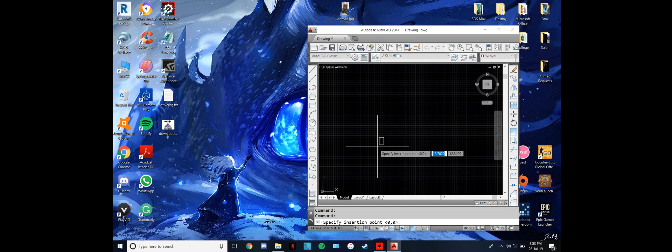So open AutoCAD, put the drawing in, scale it as much as you want using the mouse, or you can put a number in to scale it. Then use ortho mode, F8, to make a straight line at 0 degrees, and press enter. Here's the picture, so we're going to make an outline here.

First, you're going to use L for line, enter or space to confirm, and specify the corner you want the frame to start at. Let's cancel this.

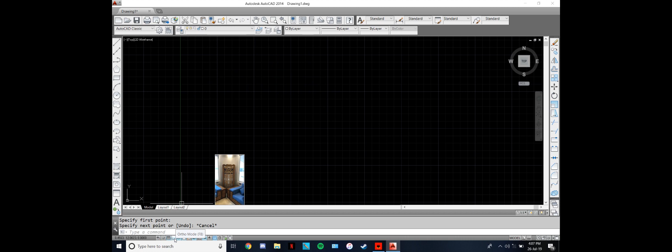If you press this, it's polar tracking. With this one, if you press line, you can use it at any angle you want, 160, 130, 44, 33, whatever number you want. But if you use this one, ortho mode, F8, the line you make can only be 0 degrees, 90 degrees, 180, or 270, and that's it.

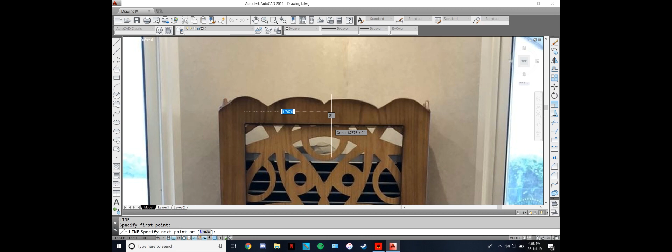So here we'll be using ortho mode for the frame. Specify this point and then take it above the half, because we'll only be needing the quarter. But if you want to make the whole thing, you can extend it all the way. If you look closely, we started at this corner but ended above the corner on the other side. You can notice the picture is not exactly straight, so we'll have to compromise. That's why I drew it only as a quarter, because that's the closest thing I can get to the line.

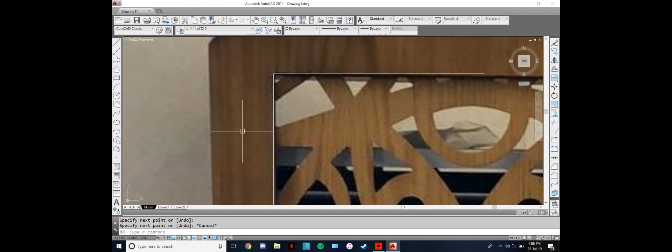And then on this side, draw the line here, and make it go below the half. Here we have the same problem, so we'll also have to compromise here. So I'm going to switch back to polar tracking by pressing F10. Here, F10, you can see polar on in the commands right here. So let's start tracing.

Like this, so on and so forth. This is for the straight lines.

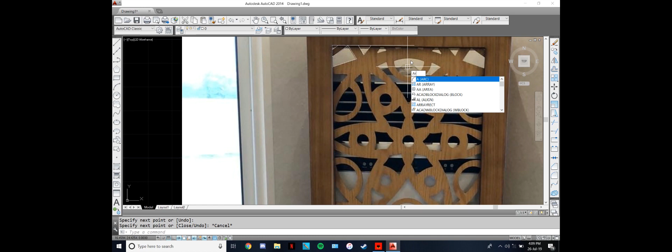And now for the arcs, press ARC, enter or space to confirm the command. For the arc I'm using, you take the first point, the second point, and the third point, and you'll get an arc. From this point to this is the radius. It's 2.6 here, so this is the arc.

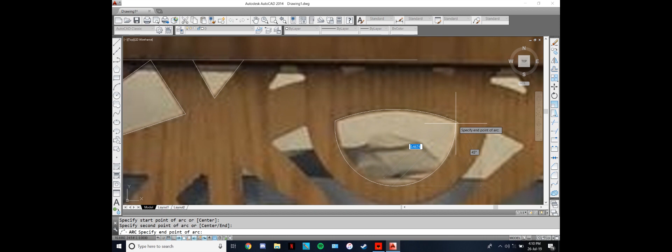So here I'm gonna start again: take the first point, the middle point, and the end point. Here we have an arc. First point, middle point, end point. Same thing here. First point, middle point.

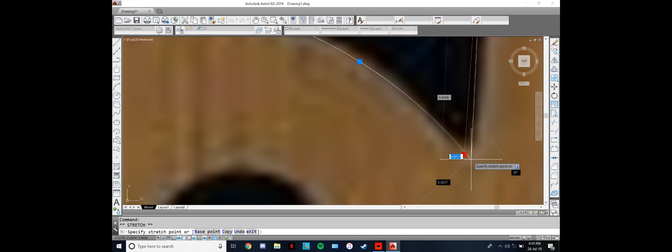End point, and then we're going to switch back to line. This is a straight line, like so. If you want to extend, you can select this and just extend this a little bit. Yep, right here, it's perfect. Not exactly perfect, but it's better than nothing.

Okay, so then for the circle, if you want to make the circle, you can see that all the circles are the same size. So here I'm just gonna try to approximate the center of the circle and then specify the radius of the circle. Then now I have the circle.

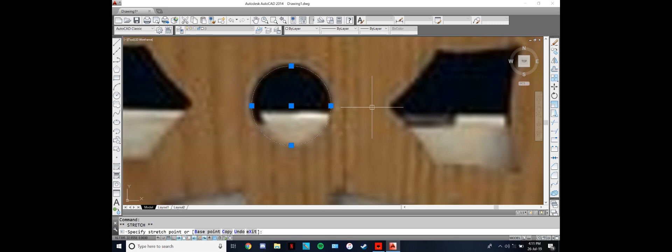So here, when you select this circle, if you press in the middle, you can move it to wherever you want, and if you press the end points, you can extend the radius however you like. So this is good. Just extend it a little bit right here, and like this.

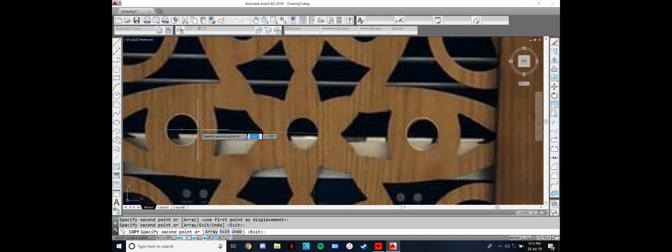Yeah, this is good. You can just CO for copy, then take this point, move it. Oh, yeah, sorry about that. Copy, then move it here, then move it here, here, etc.

So I've already finished this, so I showed you what I did. So this is the one I drew. I only drew this part, nothing more.

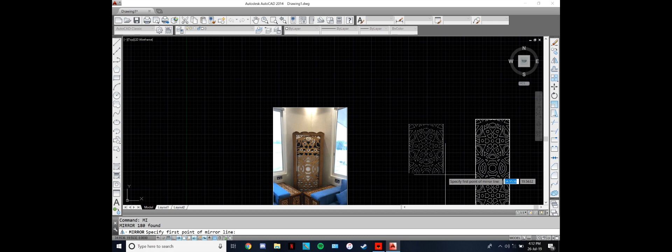And then what I did is I used the mirror option. The mirror option lets you mirror the object, just like this example right here. So use the mirror, select the object you want to mirror, then confirm, then choose the end point, and then go down a straight line just like this, and then mirror again just like this, and boom.

Here we have the complete drawing. This is the drawing that we used.

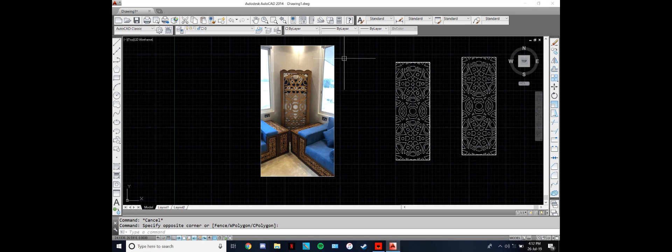So now I'm gonna show you how I can change this into an ArtCam profile. So when you want to change this, now we don't need those, we only need the final product.

So here, open the file, save as, save it wherever you want. I'm gonna save it on my desktop right here. The ArtCam we're using here is ArtCam 2008, so ArtCam 2008 takes AutoCAD files, AutoCAD 2000, LT 2000 drawing and lower. So we're gonna use AutoCAD 2000 file, change it to customer 1 and save it.

Here I save the file here and name it customer 1. I'm just gonna cut it, paste it here. This is the file. Now I'm gonna open ArtCam.

When ArtCam launches, you can go to File, open, and then open the file you want to use. So this is the file customer 1. Open it. This size doesn't matter for now. Press OK. And then they're gonna ask you if you want the vectors from the file. Press OK. Now we have the vectors.

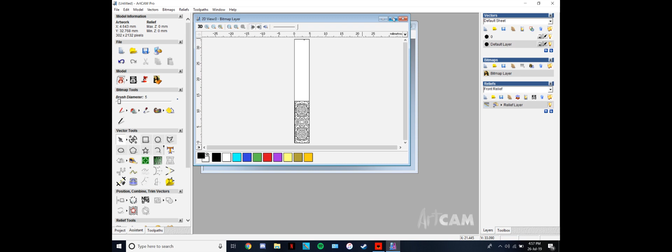Now the vector size of this is 4.6 millimeters and 13.29 millimeters. So what we want is, let's delete this and select this. Group vectors, group them so that they're one. So if I press on one, select all, it's gonna move it.

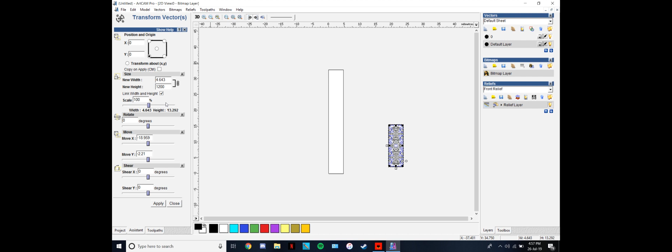Now I'm gonna transform vectors, move it to the bottom left corner at 0, 0. Make the height 1200 millimeters, or 1 meter and 20 centimeters. Apply. So this is the drawing.

Now I'm gonna copy this, Control X. Now I'm gonna press Control N or open file, new, and then new model, and put the size of the sheet. The standard size of the sheet is 2 meters 44 centimeters or 2440 millimeters, and 1220 millimeters or 1 meter 22 centimeters. Now press OK.

Would not like to save. Now expand and then copy this. I'm gonna, here, I'm gonna select this again, go to here, put to the positioning.

I'm gonna pin this, so, and now I'm gonna transform vectors, move it to the bottom left corner at 0, 0. This is 1200. Apply, and here it is.

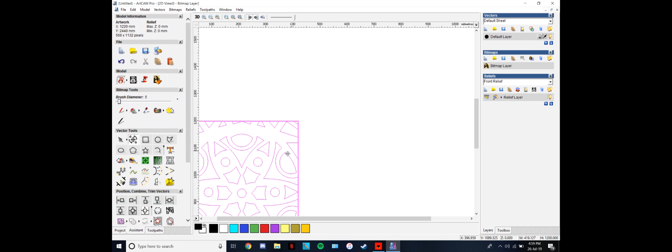So here the height is 1200 and the width is 419. So now you can see that before I grouped it, the lines were all black, but when I grouped it, some of the lines turned pink and some of them are still black. So the black lines are accepted by the profiling tool.

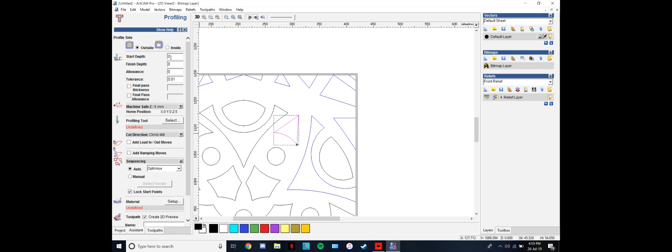So if I go here, go to toolpaths and then press 2D profiling. This is a 2D drawing, so the machine is gonna be cutting these drawings. So I'm just gonna go to 2D profiling. I'm gonna choose the depth. I need it to be 8 millimeters, cut from the inside, and select profiling tool. I'm gonna use a 5 millimeters.

Well, the one we have is 4 millimeters, so what we're gonna do is edit, diameter is 4, step down, we're just gonna keep it. The tool number, our machine has 2 tools, tool 1 and tool 2. We're gonna be using tool 2 since tool 1 is not functioning at the moment, and the rate, we're gonna put it at millimeter per minute, and the tool units is millimeter, not inches, and confirm. Also, if this is 4, you're probably gonna need to change the name, 4 millimeters. Press OK. I'm gonna choose this, select.

And now extend the end mill 4 millimeters, and the step down. The step down is every lap that the machine takes is gonna be 2.5 millimeters down. So since this is 8, for one piece, it's gonna do it 4 times. So 2.5 millimeters, and then 2.5 more, which is 5 millimeters, and then 7.5, and then 8. So we're gonna need to put it at 8 or whatever you want. Usually if the sheet is like 18 millimeters thick, I put the step down to 10 millimeters, and then here the feed rate, the speed, I'm gonna put 300.

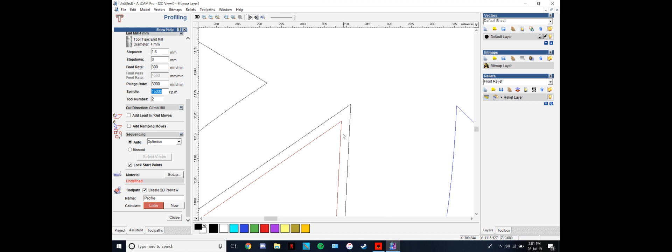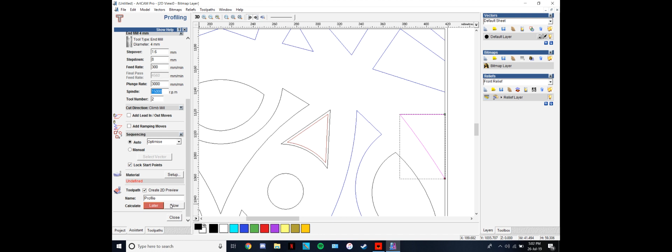Then press now, and if you look here, there's a red line. So with this red line, the bit is gonna be moving like this between this line. It's not gonna go above this line, so it's gonna be cutting here. But if you go to the blue line, such as this one, and try to work it, it's not gonna do it properly, because see here, it's gonna cut a part of the sheet we're gonna have, which we don't want.

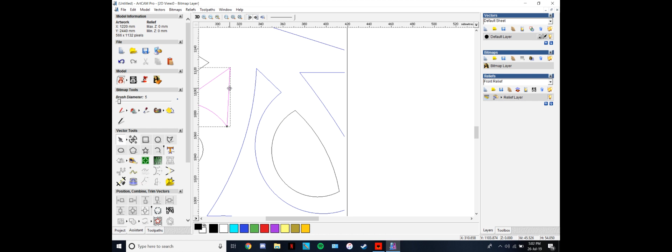So what we usually do is close this, unselect, and go back to assistant, and here we're gonna need to delete this for a second, or just cut it. And then this one we're gonna combine it, so the machine starts at the green point and ends at the red point. Just like here, as you can see, there's only one point. If you press P at whatever line you choose, you're gonna be able to move the start point of the machine, but here you can't actually do it. So what we're gonna do is make it all into one line, one shape.

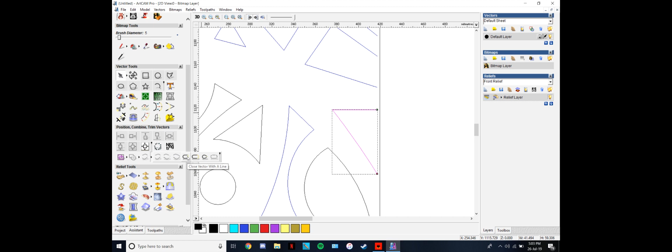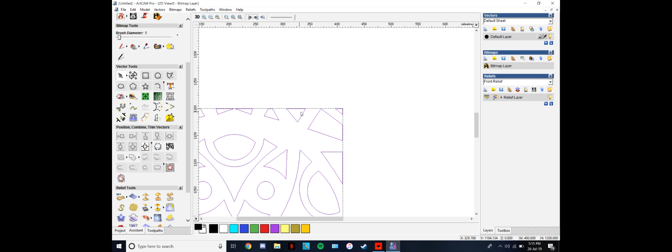So we're gonna go to the vectors, and we're gonna close the vector with a line. So if you look here, now it's closed, it's all in one. Now if you go out, group vectors, then go back, it changed into black color. So now the machine can work with it, and so on and so forth. So do this to all the blue ones. If you see an extended line that's coming out of here, like this, this one is gonna be red. Now I fixed all the mistakes here. It's all grouped, and you can see that none of them are blue or red, which means that everything is good now.

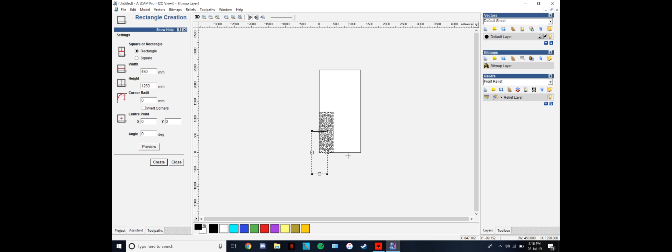So now we're gonna make the frame, because we need to have a 5cm frame, or 2mm depending on the customer, but we're gonna make it 5cm. So the height is 1200, so we're gonna add 50mm, and the width I changed it to 400, so we're gonna need to put the width at 450 and then create the rectangle. Now gonna need to take this, move it here, take out drawing and move it here.

Now we're just gonna take this, go to transform vectors, move it to the left corner to 0, 0. We can check the height here and the width, apply. Now it's in this corner. Now we're gonna select our drawing and select the box and center in page.

So we're gonna center this in this. So center. Oh, this one centers it in the page. This one centers the vector. So now this is the final product.

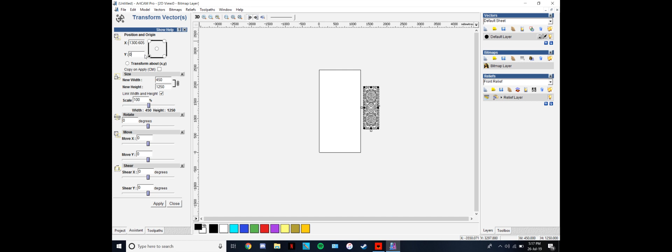Gonna go again, group vectors, gonna transform, move to the bottom left corner to 0, 0, then apply. Now it's in this corner, the corner we want it to be in. This line we don't need to keep, because if we keep it, the machine is gonna register this as a vector and cut around this, but we don't need to cut around this.

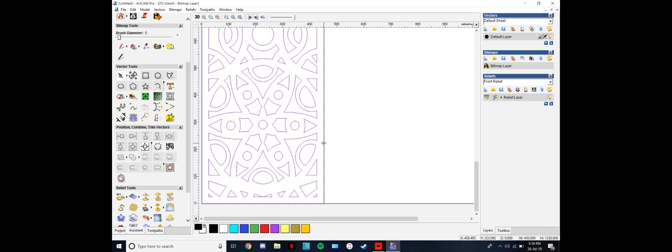Because the piece of wood we have is already 1250 and 450, the outer box is not needed. We just needed it for now so that we can get the inside to be in the exact position. So I'm gonna delete this.

Now I'm gonna select this, group the vectors, go to toolpaths, 2D profiling, and then I'm gonna put a profile side from the inside, so the bit's gonna be moving inside, not outside. So need inside. The depth is gonna be 8. Profiling tool is gonna be end mill 4 millimeters on wood. Make sure it's rough and 2D finishing. End mill 4 millimeter. Select and then go down.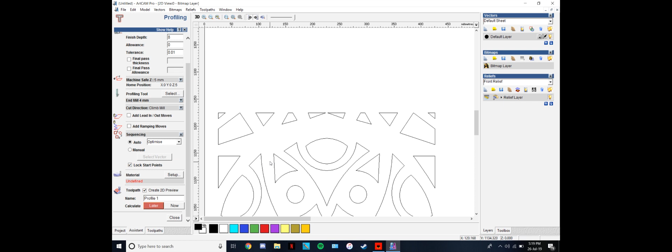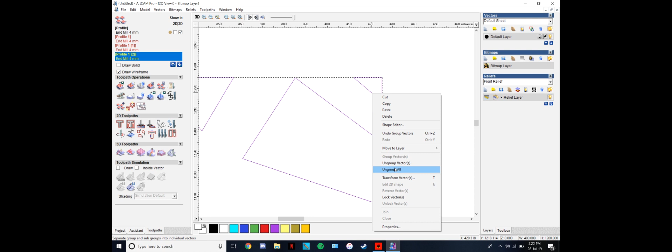Press now. And okay, we have a mistake here. So let's fix it. Let's see where's the issue. So if we select this, ungroup, and try to look at this, I think we might have an overlapping. I found what the problem was. So if I select this, group it together, then here we have blue lines. Ungroup. Yep, there's a line here.

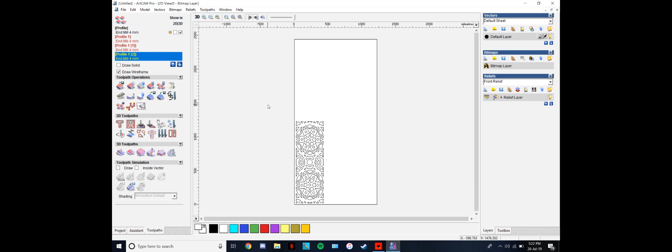I'm just gonna cut this, delete this, and then paste it, and do the same thing in this corner. I'm gonna cut this, delete this, and paste it. Gonna cut this, delete this line and paste it. Same thing for this corner. Gonna cut it, no line. Okay, good. So now it should not be a problem.

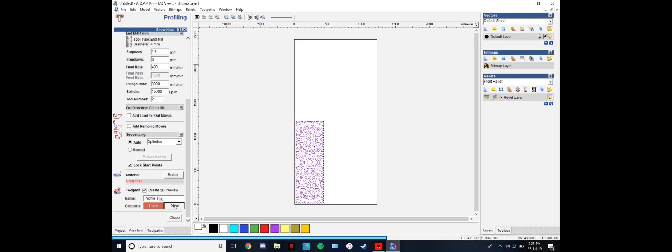To profiling. Wait, here I already have the option here. So select all, group vectors, 8, and then the 2D I chose this. Step down, put the step down at 8 millimeters. Feed rate 300 or 400. Tool number is 2, the one I'm using. Press now, and yes, success.

So if you look at the red lines, this is the... okay. So everything's ready. If you want to check how the machine is gonna move, just right click on the drawing, simulate toolpath, give it a second, and it should show you. Simulate start. And so the simulation right here, it's gonna be cutting them like this.

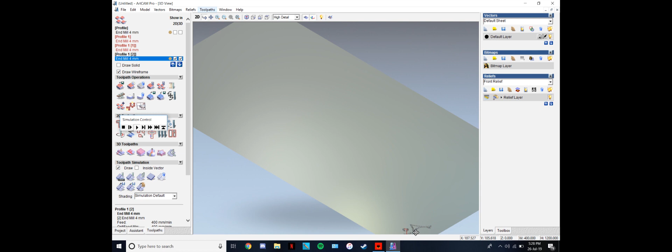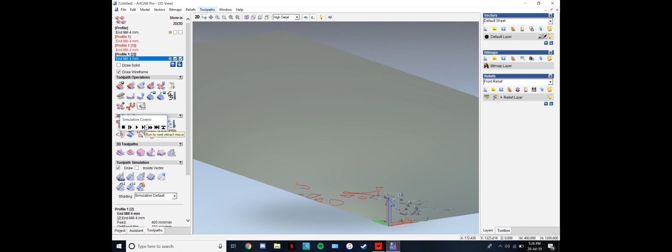Now this way you can simulate how the machine is gonna work its wonder, as you can see. Then now just fast forward to the end. Next retract, so on and so forth. It's gonna finish all of this and the whole thing. Now like this you can see how the machine is gonna work it. So just wanna save.

So now I'm just gonna save on desktop samples. Here I have some extra NC type files on my desktop, so I'm just gonna save it on file 33, save it, replace it, and close. That's it.

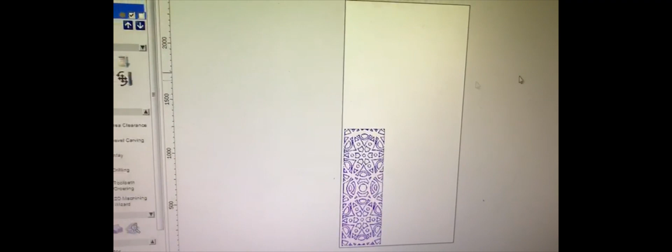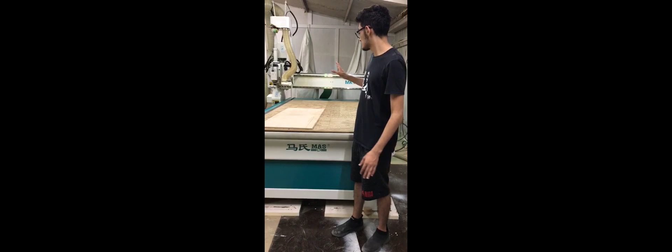So this is the CNC router machine. There are different kinds of CNC machines. There's CNC routers such as this one, the one that has a bit that goes through the wood. There's also CNC plasma, CNC laser, and CNC water jet. As I already said, this is a CNC router. So if you follow me here, these two are the routers. This is tool 1 and this is tool 2. At the moment we're using tool 2 as our main router, but we can use either of them.

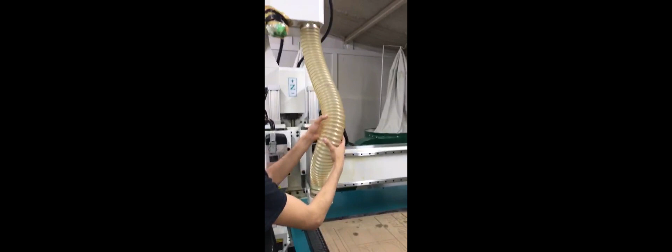So look here, this is the dust collector. I'll talk about the dust collector in just a second. So if you look here, this is the bit. This one, this is the bit. Okay, and this whole thing is the router.

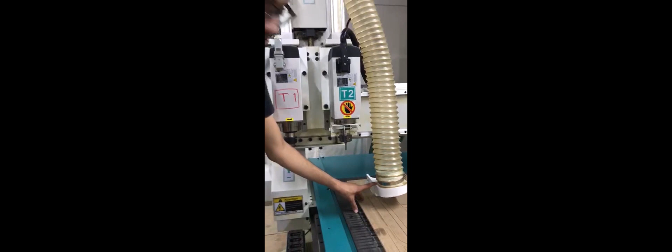So when the machine starts, this router spins the spindle or the bit at 15,000 RPM. Of course, you can set your own RPM, 15,000, 12,000, whatever suits you. If it's a very small, thin bit, you can use lower.

RPMs, but this is a very big, this is a 6 mm bit, so we're using 15,000 RPM. So let me close this.

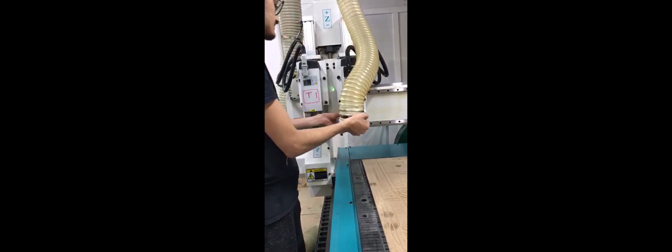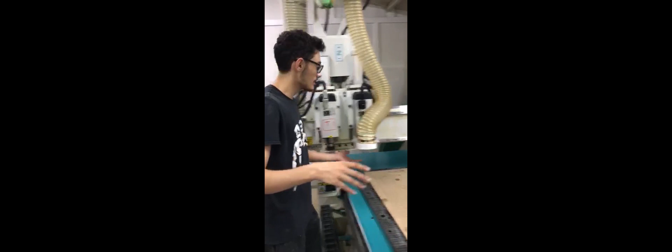Okay, so now we're gonna talk about the dust collector. The dust collector does two things. First, it sucks up the dust left out from drilling through the wood and takes it up here, up this one, and through here and into these bags. These bags are full of dust. You can see they're full of dust. The second thing that the dust collector does is collect the cold air from the room and pull it up through the router and the dust collector to cool down the spindle.

Okay, so now let's talk about the vacuum. So this is a water pump. It uses water to create pressure to create a vacuum. And here, look here. These holes are where the air goes through.

So the vacuum just sucks out the air, and the air passes through here and sucks down the piece of wood. Well, currently the piece of wood that we have here is damaged. So if it's sucking the wood, it's going to be leaking the air. So we're not using the vacuum. We're just using clamps. We put clamps here to hold the piece of wood in.

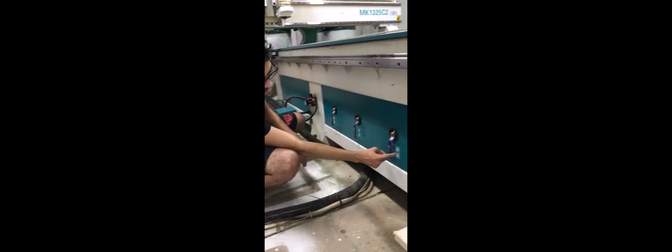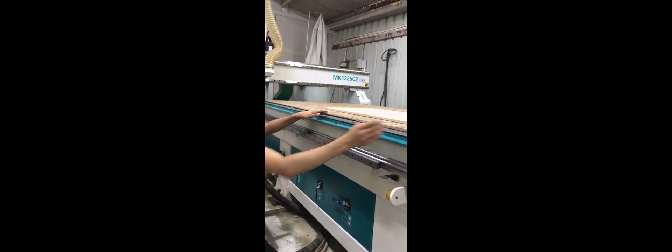Okay, come here. We have here 3 switches. The first switch, as you can see here, is for the first part. So this part here. It opens and closes the vacuum here. Now the vacuum is open, so if I turn on the vacuum, it's going to be sucking air. If I pull it up, it's going to close. As you can see here, it says open and close. So now it's open. If I turn it like this, it's gonna close.

The second switch is for the middle, as you can see from the symbol. So like this is open, and like this the vacuum is closed. So in the middle it will not be sucking any air. And here, this is the last one. This is for the top. It opens and closes the vacuum just like these two.

So how can this be useful? If you have a piece of wood here that you need to adjust, but you don't want to turn off the vacuum, you can just pull the switch up, change the position of the piece of wood, and then open the vacuum from the switch without turning off the vacuum itself. Maybe the vacuum you have takes a long time to warm up or to start working. So this is very convenient.

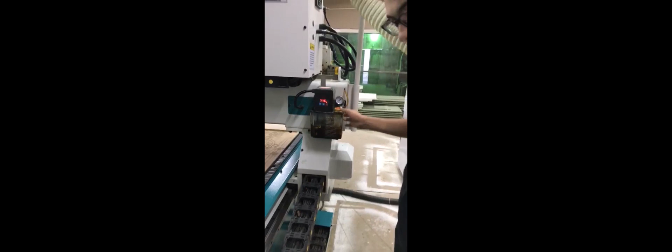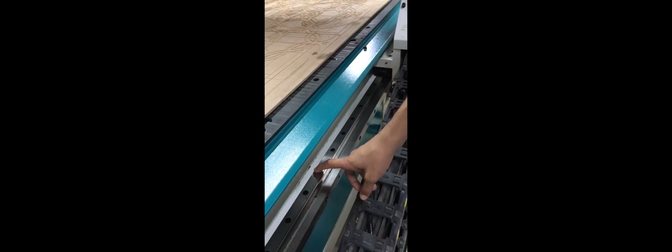So this is the oil tank or the oil container. The oil here lubricates the rails of the machine, such as this rail. This is the rail for the y-axis. There's also a rail for the x-axis and the z-axis. So if you look here, there's a timer here. We have the machine set so it drops oil for 2 consecutive seconds every 8 hours.

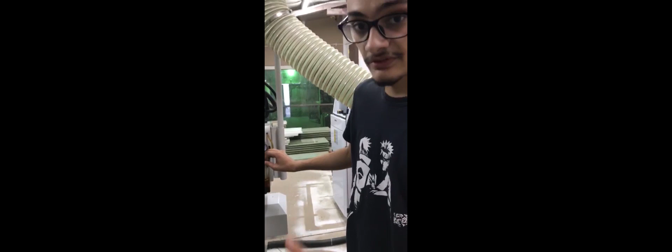Usually when we start working on the machine, we turn it on for 8 hours until the work is done. So every day we just work for 8 hours. So we have this set for 8 hours, and it drops 2 seconds worth of oil. If you look here, this is the filter for the oil. We put the oil in here, and this is also a filter that filters the oil, just in case there's any dirt or any waste. We don't want the waste to be in the oil, because we want the oil to be clean when it goes to the rails, so that it doesn't cause damage to the rails.

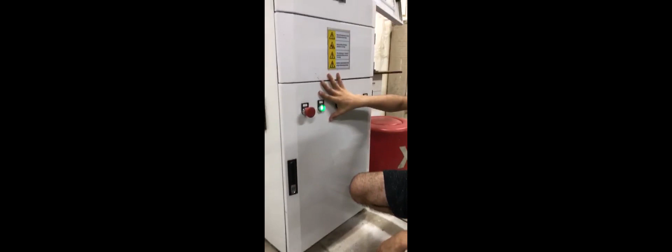Okay, so here we have 5 switches. The first switch is the stop switch. This is an emergency switch. If I press this, it stops the machine.

This one you use in case of an emergency that happens and you can't reach the computer to stop the machine from NC Studio. You can just press this to stop the machine. As you can see, the light here turned off. That means the machine now stops working. After you're done fixing whatever happened, you just turn this clockwise and it will open.

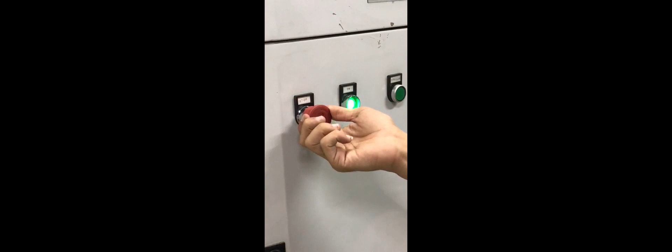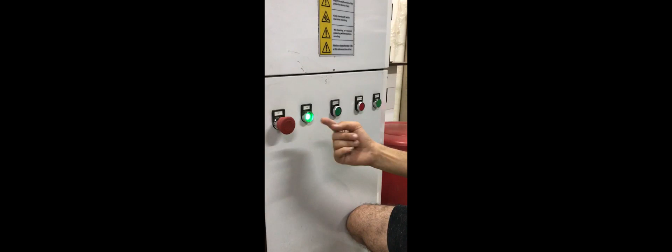The second switch is the on and off switch. So now it's pressed inside, so now it's on. If I press it again, it's gonna go out and it's gonna turn it off. The third button is the vacuum button. If I turn this, it turns on the water pump that creates the vacuum. And the fourth switch is the off vacuum. So if I press this, it turns off the vacuum.

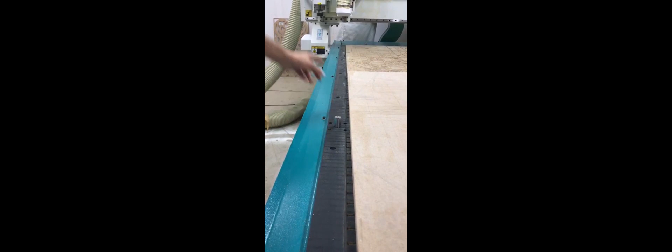Lastly, we have the location button. So if you look here, when I press the location button, it's gonna push 4 pistons up. And I can use these pistons to adjust the piece of wood at a 90-degree angle, just like this.

Now the piece of wood is okay, so it's gonna push it to align it with the pistons so that it's gonna be straight. It's not gonna be tilted or rotated in any way. So just push it again and make sure it's good. And then now just press the location button and it will drop them down.

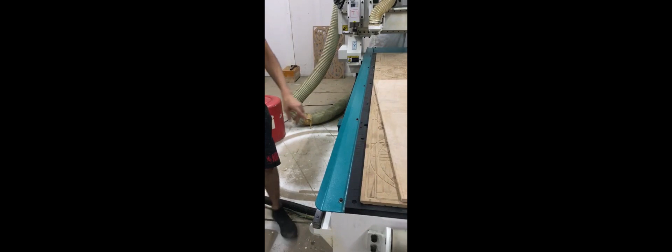Also, if this is pressed and they're up, if I turn on the vacuum, the pistons will drop down. And if I turn off the vacuum, the pistons are gonna go up. But now I'm just gonna keep them down. The piece of wood is already in place. I don't need to move it anymore.

Now we have this piece of wood that we're gonna be doing the work on. We're gonna put this piece of wood on top of the main piece of wood so that it doesn't damage the vacuum. The black sheet here is the main board for the machine, so we don't want to damage it. So we put an extra sheet up so that we can protect the machine from being damaged.

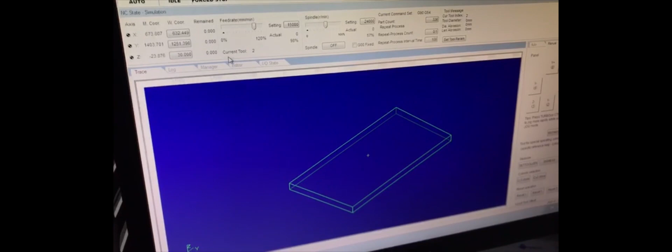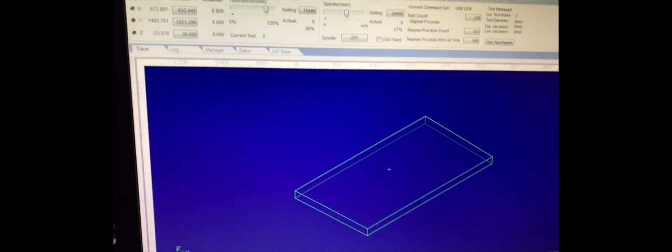Now I'm gonna go up and simulate, or F8, to simulate the drawing on the board here on the screen. Okay, now after the simulation is done, you'll have to stop the simulation. Now you can start the machine, but we're not gonna start it yet. We need to set the origin of the machine.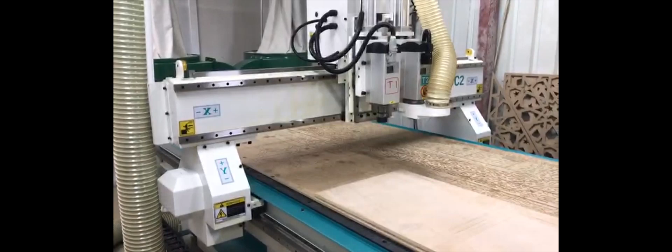So if I clear this, and if you look here closely, you see this plus? This plus shows you the location of the bit. So if you look there, it's in the middle of the machine, and the same here. So the plus sign is the location of the bit. So here we're gonna need to set the origin.

So here I'm just gonna go to the right side of the application, on manual. I'm gonna press on manual, and here you'll have a panel. This panel helps you to move the machine to wherever you want. So plus Y, minus Y, X minus, X plus, Z plus, and Z minus.

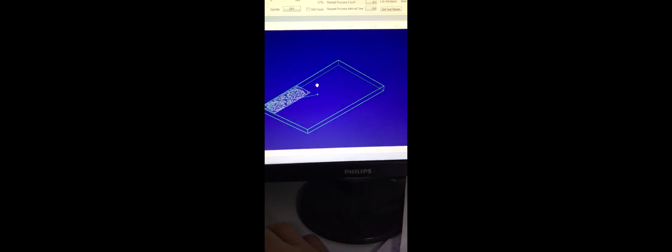So the Y plus and the Y minus move the machine forward and backwards. The X plus and X minus move the machine sideways, right and left, and the Z plus and Z minus move it up and down. Okay, so let's go back here.

Now what I'm gonna do is open this cylinder. So I'm gonna be using tool 2. So cylinder 2, we're gonna need to open it. Now the tool is open. If you look here, we opened this one. Now this one went down, and this one is still up because this one is open and this one is closed.

So now I'm gonna need to move the machine over here to wherever I need it to start at, and wherever I put it is gonna be the origin of the machine. But if you look here at the panel, the one I was talking about before that lets you move the machine, you can see that there are numbers 8, 9, 4, 6, 1, 2.

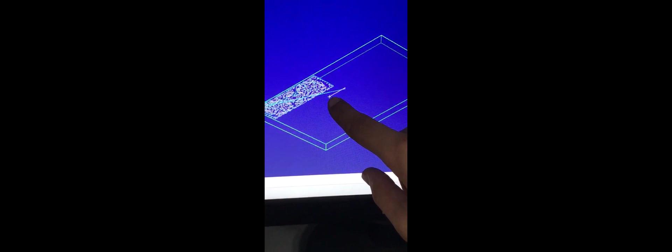These numbers resemble the numbers on the number pads. If you look down here, you can use 8, 9, 4, 6, 1, and 2 to move the machine. So if I press 2, you can see the plus shows the location of the bit. If you look here, it's moving. Okay, and now I'm gonna move the machine over here and set the zeros over here.

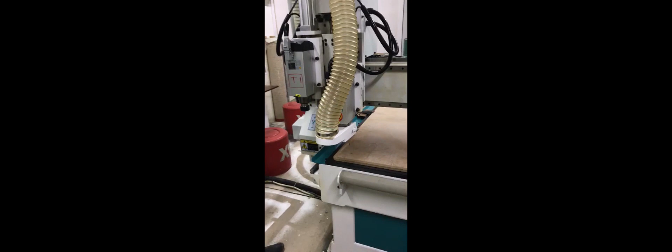So now I'm gonna move it backwards. Now I need to slow the speed down so that I can get the position as accurate as it can be. So first I'm gonna set the Z. I'm just gonna get a piece of paper and put it here. I'm just gonna move this forward a bit.

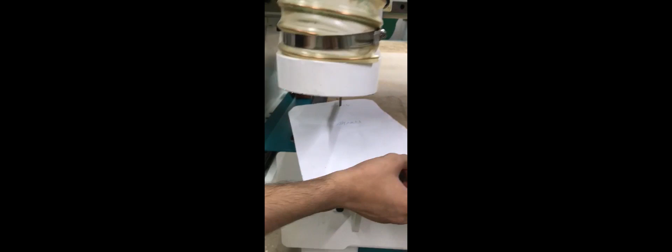Now what I'm gonna do is push this down. I'm just gonna push it slowly and keep moving the piece of paper. When the piece of paper stops moving, that means the bit has touched the piece of paper. You can see it stopped moving. So now I'm gonna go over here and reset Z. Reset Z. Okay, now the Z is reset.

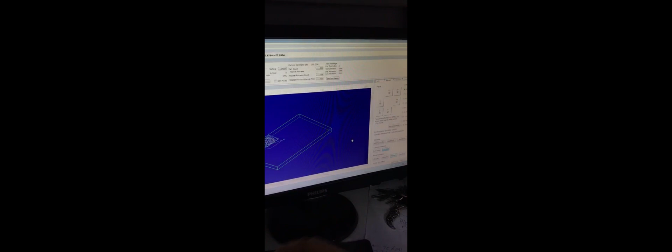The height is reset. Now I need to reset the X and the Y. You can reset X and Y at the same time here, or you can reset them separately, whatever you like. So if you go back to the machine, now I need to push this upwards a bit to move this. Now I'm gonna put the bit in this corner. So I need to move it to the right a bit, then down. Okay, so now we moved it down.

What you're gonna do now is check if everything's good. Look at it from both sides. Make sure that the center of the bit is on the point you want, not the corner of the bit. So now everything's good, and I'm gonna go back here. Now the X and the Y are reset. You can reset both of them, or reset X and Y separately, whatever. Now since everything is set, I'm gonna move to origin, or press F7.

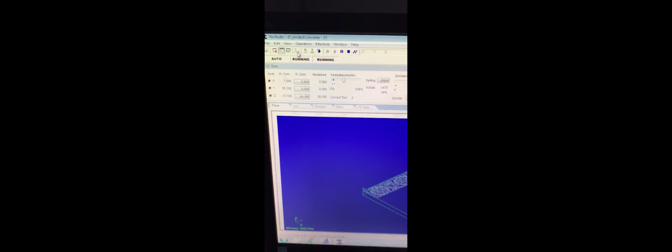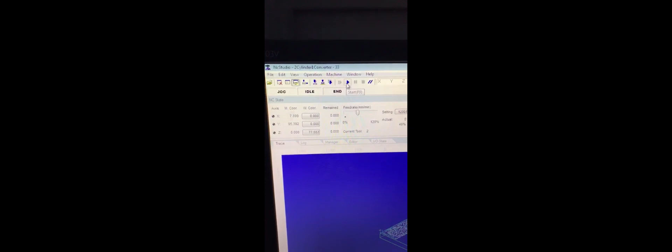So now I just need to move the machine to the 0. Okay, now the machine is put to 0. I'm gonna go back to manual, and I'm gonna open the second cylinder. Just make sure it's open. If it's not open, you need to open it, and if it's open, just keep it. Now everything's set. It's at the origin point. The simulation is done. The drawing is here. Now I'm gonna just start it. Okay. Now the bit is moving at 24,000 RPM.

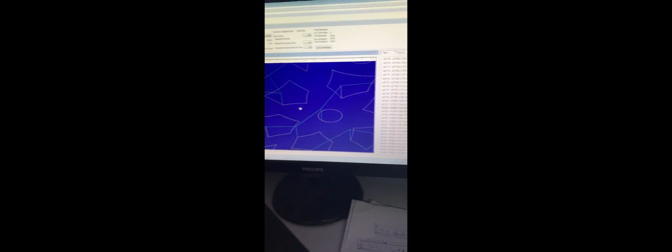The small plus that's moving is the bit. This is the location of the bit, so you can always keep an eye on it. But it's better to keep an eye on the machine itself so that if anything happens, you can be ready to stop it. So keep an eye on the machine and stay beside the computer at the same time. That's the best thing to do. You can see these pieces, you can just remove them.

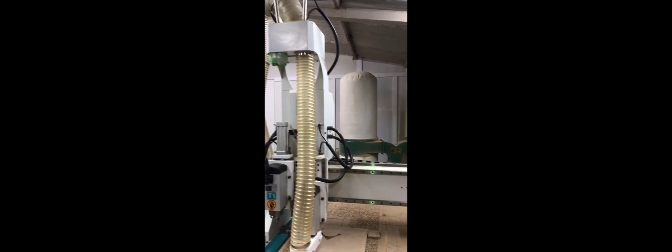Okay, so if you look here, it's clean because the dust collector is sucking up the dust and not keeping it in here. If the dust stays in here, sometimes it gets under the piece of wood and might push the wood upwards. That's why the dust collector is important. After the dust was collected, we just pick the extra pieces and throw them on the side.

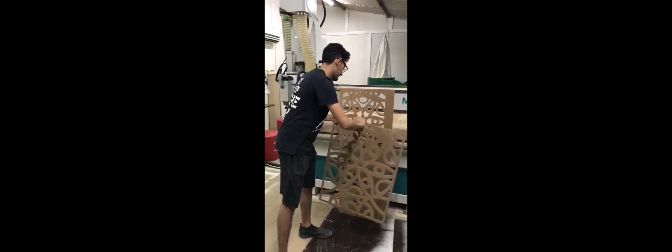So here we finished only half of the drawing. You can see this half. It's clean. We just removed the extra pieces that were drilled, and we took them out. So this is the finished product. Also, we have here another one. This one has the same drawing, but a bit bigger on a smaller sheet. So you can see here, it's a drawing. So that's it for the video.